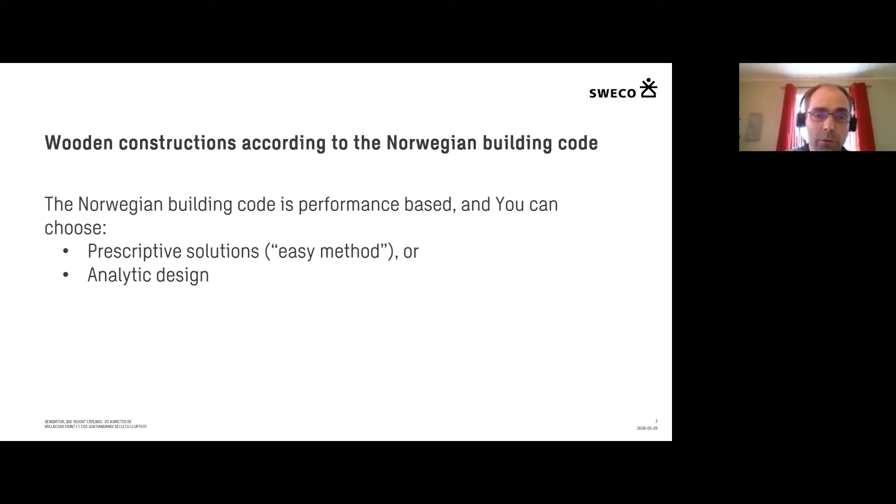In Norway, our building code is performance-based, and we can choose either to do prescriptive solutions, what we call the easy method, or we can do a full analytical design.

If you use the simple method, the prescriptive solutions in Norway have different requirements of the load-bearing systems according to the building height. So in buildings with 1 to 4 floors, we are permitted to use wooden constructions in the load-bearing structures. But buildings with 5 or more floors require non-combustible materials.

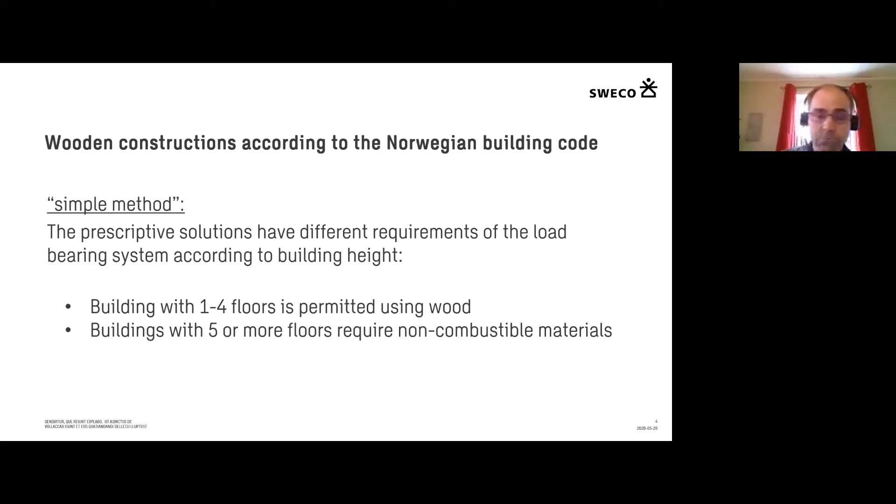That is why in wooden buildings with more than 4 floors, we have to do analytical design. The Norwegian building code requires that the main load-bearing system shall be dimensioned in order to maintain satisfactory capacity and stability through a burnout, as it can be modeled.

This is the difficult part when we're working with wooden construction, because the construction will burn itself. Even though the fire burns out in the building, we have to prove that the load-bearing system will not continue burning and in the end collapse. So that's the difficult part of working with wooden structures.

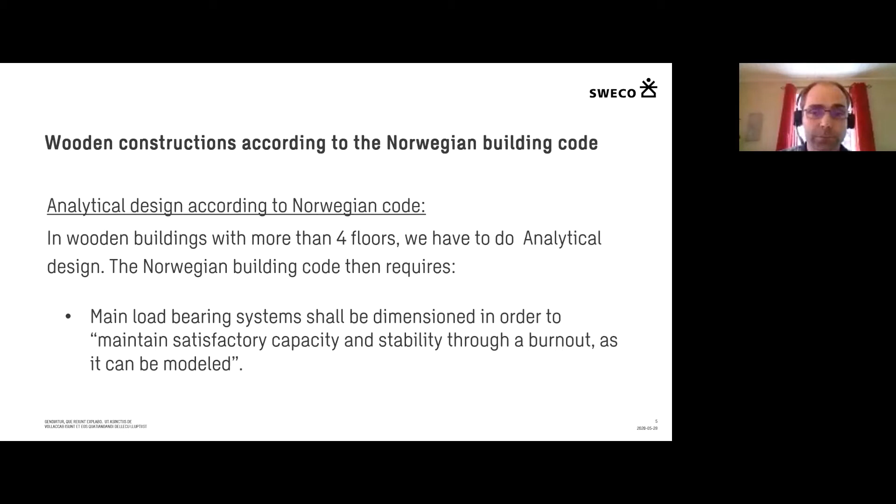So in Mjøstårnet, the solution is analytical design. We have to prove that the building maintains stability through a burnout scenario, and we have to increase fire safety with several design solutions and fire safety technology.

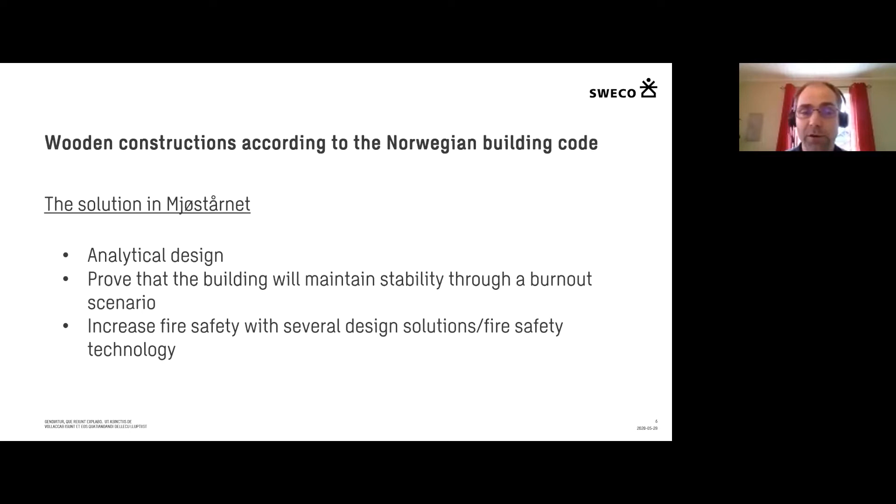Let's look at the fire protection strategy for Mjøstårnet. When we work with this building, the main challenges are, of course, the height of the building. This one is 85.4 meters high. So that's a main challenge for us.

We have to prove the load-bearing system will work through a burnout scenario. This building is not allowed to collapse. There is a wooden façade, and this gives a risk of fire spread outside the building, which is a main problem. And of course, hidden fires.

A building with combustible materials will have a problem with fire spread in closed areas and things like that. So the main challenges are both the height and the use of wood in the facade, the load-bearing system, and hidden fires.

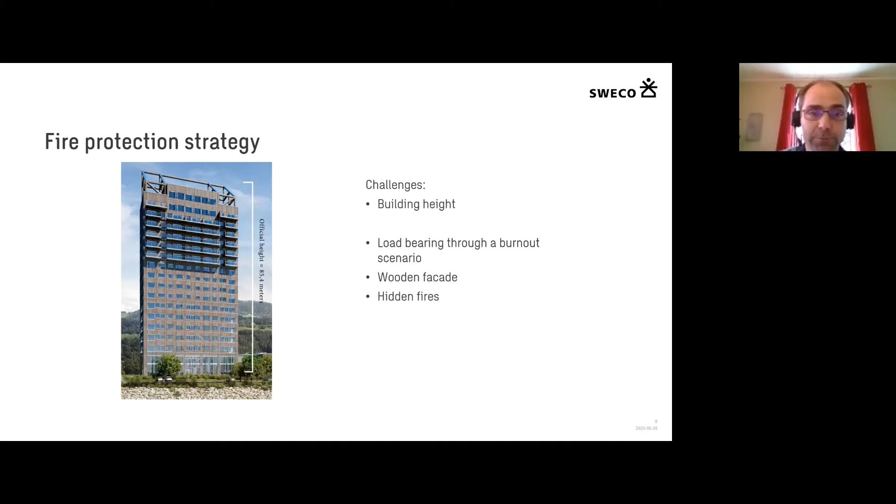When constructing Mjøstårnet, we have dimensioned the load-bearing structures with 120 minutes of fire resistance. Additionally, we have proven that this will maintain stability through a complete fire, or total burnout, in the building. I'll tell more about that later.

All the shafts are closed for each floor with 60 minutes of fire resistance. We don't want any fire to spread from floor to floor through open shafts and sealed areas like that. So every shaft is closed for each floor.

Of course, we have sprinkler protection, but in this case, we have increased reliability on the sprinklers. It means double water supply, quick response sprinklers, a lot more water. And in this case, we have also connected the sprinklers to the fire alarm.

This means if someone tries to disconnect any of the sprinklers, you will get a technical alarm on the fire alarm, so you know what's actually happening in the big building. All this is to increase the probability for the sprinkler to control or even extinguish a fire before it becomes a problem for the combustible materials in the building.

The next one is the vent hoses in the building. We do some fire protection of them. We don't want any warm metallic hoses to ignite combustible materials, so there are insulation materials to protect them.

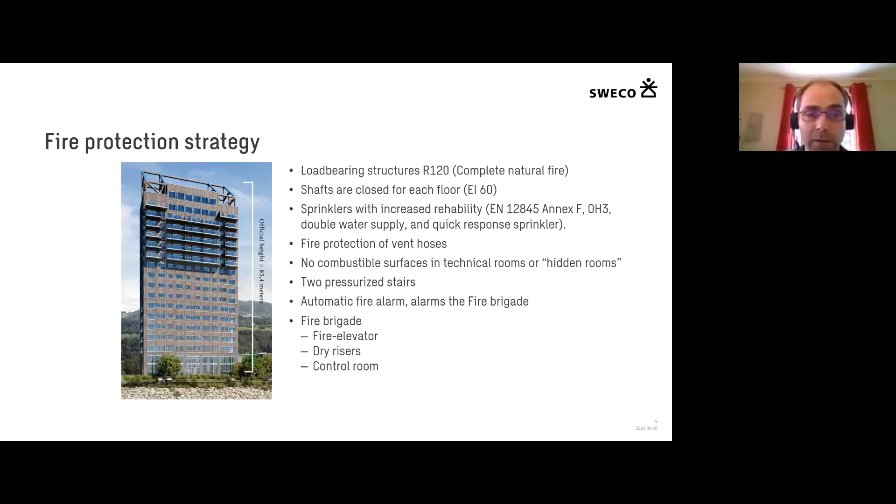This is not common in Norway to use control rooms. I know other countries have this in their regulations. In Norway, we don't normally use that, but we added this part in Mjøstårnet.

Then we have the facade, and as I told earlier, it is a wooden facade in the building. These are made with elements for each floor, and the cladding is made with fire retardants, so they will resist to B-s1,d0.

It means difficult to combust, low smoke production, and no burning droplets. We do not allow any combustible insulation materials, no plastic materials or things like that, only materials which remain A2-s1,d0, incombustible materials.

Certain areas of the facade are sprinkler protected. This means balconies and the first 2 levels of the building. We want to protect the building against outside fire.

And even though the 2 first levels of the facade are made mainly with glass and aluminium constructions, there are some wooden parts, and we protect them with outside sprinklers. We don't want an outside fire to threaten the building.

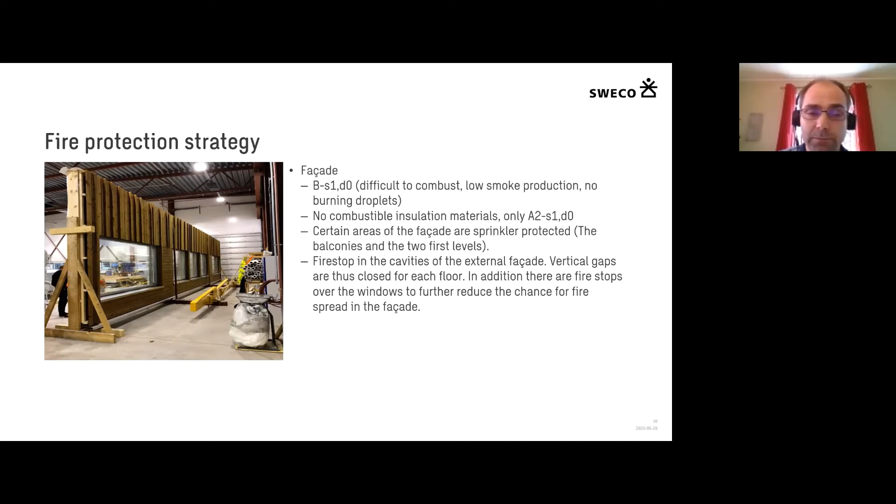If you look at a typical floor plan, you can see this picture is a little bit small, but I'll explain. These red lines are the staircases and the elevator shafts. They are made with CLT elements, 60 minutes of fire resistance, and they are all treated with retardants to ensure B-s1,d0.

One of the staircases and all the shafts are covered with non-combustible materials. As I told earlier, these technical rooms, hidden areas, and one of the stairs have CLT covered with plasterboards to reduce the risk of fire spread.

The blue lines are the other walls in the floor plan. They are made with traditional non-combustible materials, 60 minutes of fire resistance. In a typical floor plan like this, we have a large office area around the facade.

We have one fire cell for technical rooms, separate fire cells for technical rooms, storage rooms, and shafts. We have separate fire cells for the corridor in front of the staircases and elevator shafts. The same principle applies in the part of the building used for hotel rooms, but of course every hotel room is its own fire cell.

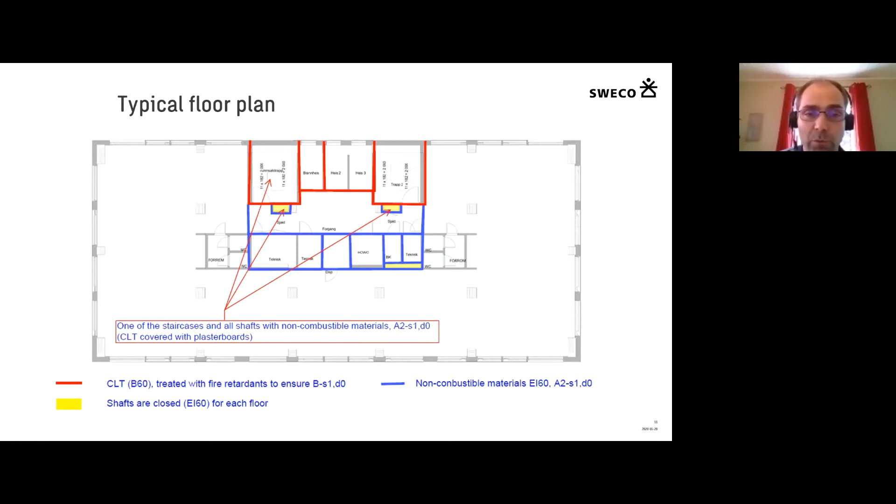If you look inside the building, we can see a typical compartment where we have these large glulam beams and columns, but the rest of the materials is quite traditional, with plasterboards on the wall. We have concrete with traditional floor materials, and ceilings with incombustible materials.

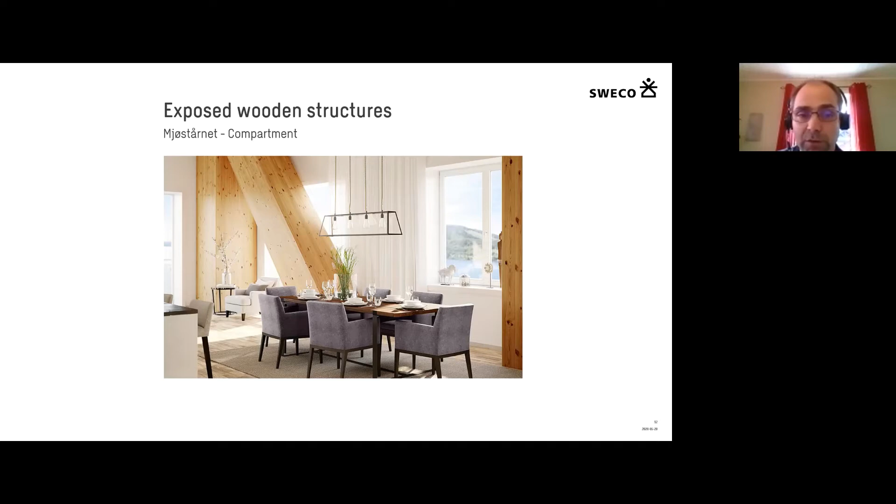We can see the same in a picture of the office part. We have these large glulam constructions in wood materials, but the rest of the materials is traditional.

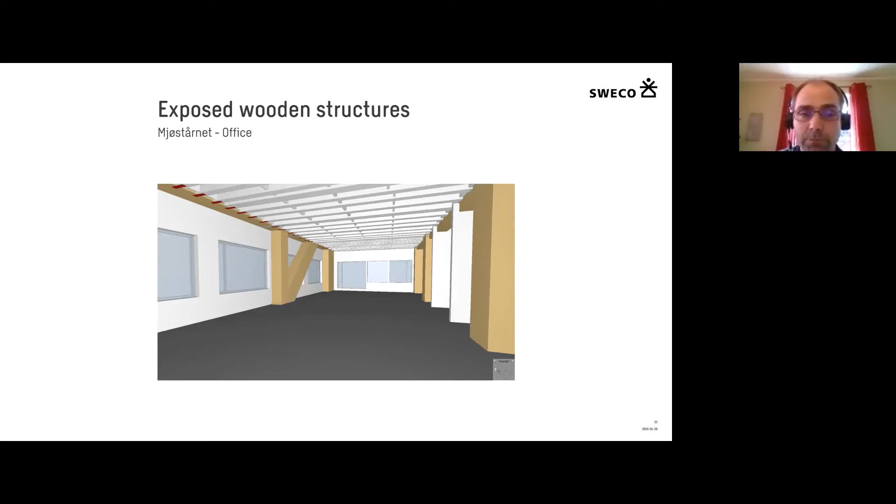So I wanted to say more about the design philosophy behind this building, what kind of testing and research we have done, and how we prove that this wooden construction will resist a complete fire or a total burnout.

When we do analytical design with wooden structures, we have to look at what happens to the structure after the fully developed fire. In the decay period of the fire, will the wooden structure continue to burn, or will the charring stop when the fire inside the building burns out?

The question is, can we use something from the examples on the pictures below in designing wooden buildings? The picture on the left shows some trees after a forest fire. In this case, there are a lot of combustible materials. It's outside, so there's plenty of oxygen and there's been a lot of temperature, but still these trees are remaining. Why is that?

The picture on the right shows a traditional campfire. The question is, why are these logs remaining after the fire has burned out? When we work with these kinds of problems, we want to investigate and better understand whether we can use some of these principles in designing safe wooden constructions.

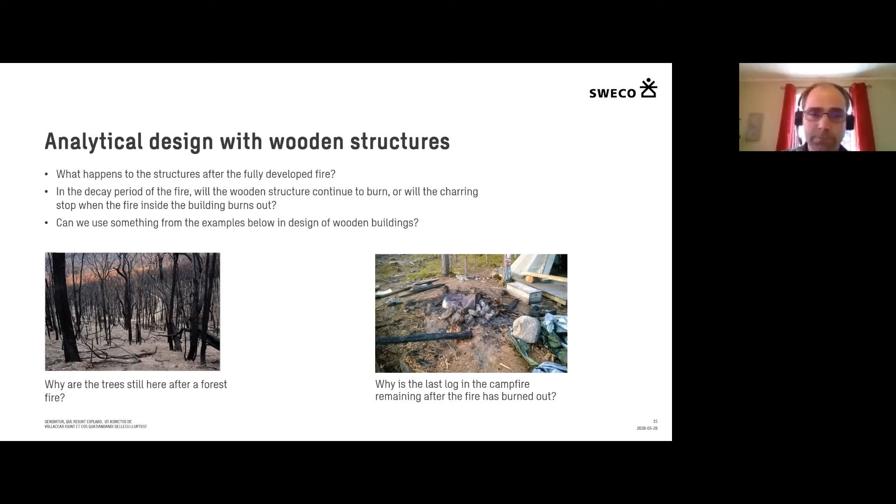So in preparation of the Mjøstårnet project, we did some testing to learn more about the decay period of the fire. We wanted to study what happens with wooden structures after the fully developed fire. Will they continue burning, or will the charring of massive wooden structures stop, like you saw with the log campfire on the slide before?

So we have tested charring of wooden constructions, and we are especially interested in the decay period of the fire—not the fully developed fire, but what happens afterward when the fire burns out in the building, and what happens with the wooden structures, which are combustible.

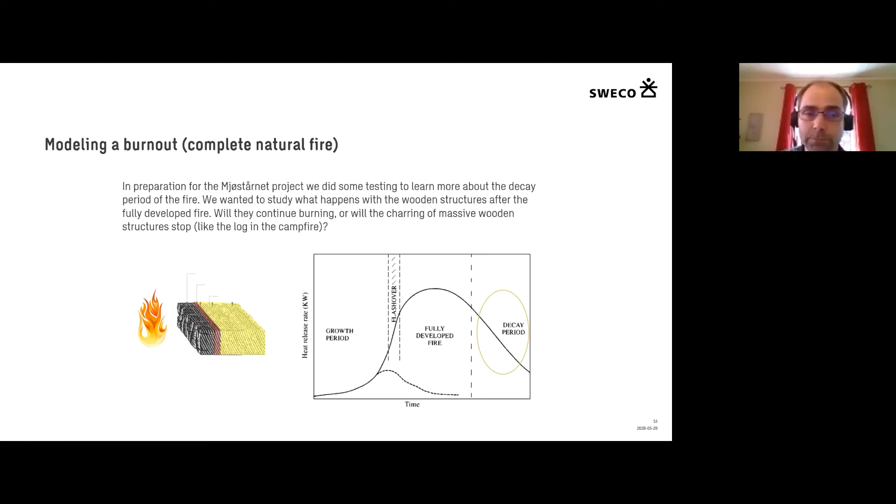We have done some tests, and we made some test columns, which we brought to a laboratory in Trondheim, Norway. We put them in a test oven and used a time-temperature curve for 90 minutes before we turned off the burners.

90 minutes is from the Norwegian prescriptive regulations. It says 90 minutes for a building with more than 4 floors. So that's why we used 90 minutes. But these tests have been done many times before.

Normally you take the columns out of the oven, cool them down, and measure the charring depth. What was interesting was the cooling phase. So we left one of the columns inside the oven, where there was still a lot of temperature, and we lifted another column out from the oven and put it at room temperature.

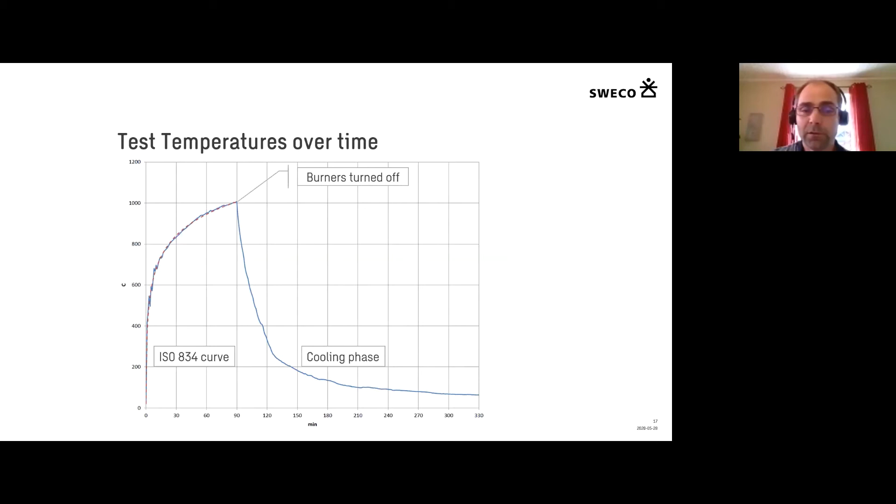For both cases, we wanted to investigate what happened in the cooling phase. We let the fire and charring continue for as much as 5.5 hours before we stopped the test. Normally you stop after 90 minutes, but we continued for 330 minutes.

We had 3 columns made by Moelven. All of them are 50 by 50 centimeters, and the height of them is 3 meters. As you can see, we have a lot of temperature sensors mounted inside them, so we can follow the rise of temperature and the charring in the constructions.

Columns A and B are made to investigate the charring depth and the temperature rise inside the wooden structures. Column C is made to investigate the connections of steel. Mjøstårnet is designed so that the steel connections are protected with the wood itself. The theory is that a steel construction behind the charring layer will never reach critical temperature for the steel. So we wanted to test one of these connections to see what actually happens.

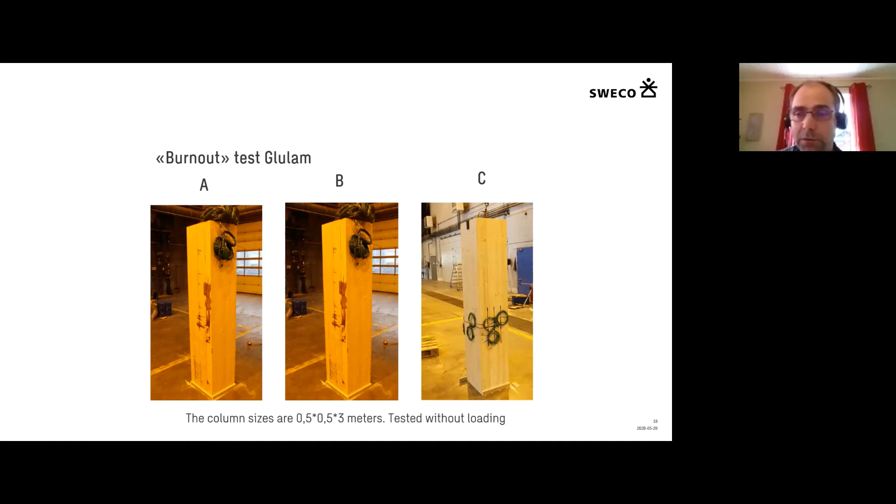On this slide, you can see a principle for such connections with the steel plates inside the wooden constructions. To secure these gaps or slices where the steel plate is, they are mounted with intumescent strips to stop the fire from entering the steel. All the holes for the bolts through the constructions are covered with wooden plugs or fire sealant.

The picture on the right, from the test, shows it still continues burning and charring. Those black lines here are the intumescent strips protecting the steel in the gaps in the wood. We used the Eurocode's reduced cross-section method in dimensioning these details, but we did a burnout test to actually measure what happens.

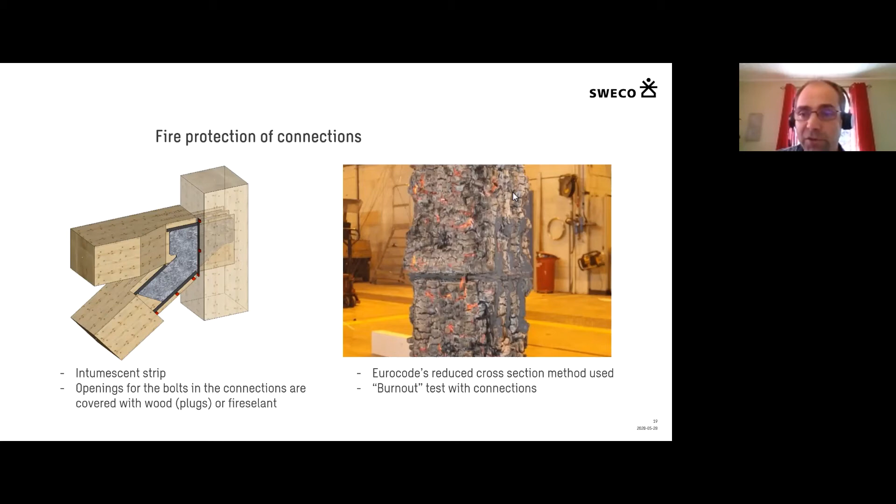Here you can see from preparing the test, we have the steel plates inside the columns. We have these intumescent strips protecting them from the openings between the wooden constructions. We have a lot of temperature sensors inside. And here you can see the bolts holding this together, and the holes I told you about are, of course, here. All the holes for the bolts are plugged.

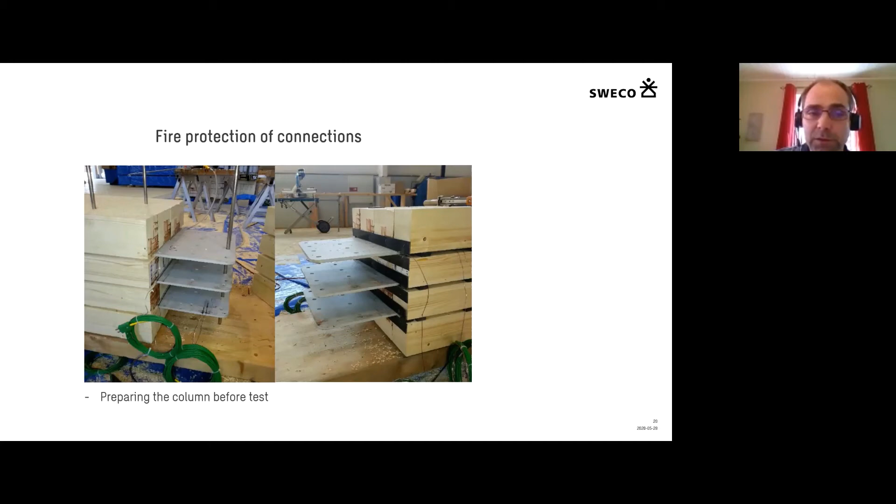Sealed with wooden plugs. But in this test, we wanted to see what happens, how effective these plugs are. So on one side, we sealed with wooden plugs. On the other side, we left it unsealed, meaning there's an opening in the column to the bolts behind. We have the steel plates here, and these are the bolts through the construction. We have an intumescent strip covering this gap, with sealed bolts on this side and unsealed bolts on this side.

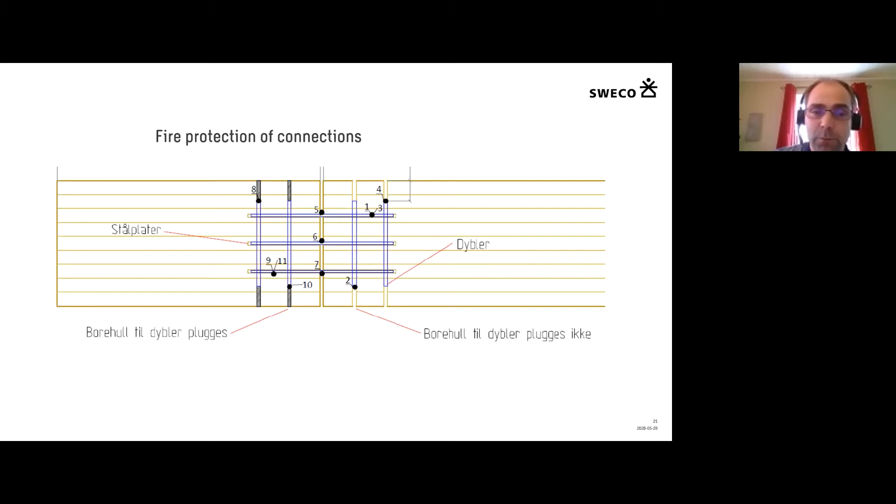From the test, we had some interesting results. We can see that all these temperatures are far below what's critical for the steel constructions. We know that the temperature in the charring layer is 300 degrees, so what's behind will, of course, have a lower temperature. But we wanted to investigate if this actually happens, and we can see we have no more than 250 degrees in the steel constructions inside.

These lines, you have some stippled lines and some complete lines. The complete ones are those sealed with wooden plugs. The stippled lines are the parts not sealed with wooden plugs in their bolt holes. It's interesting to see there is not a very big difference in temperatures between those two sides, and this is only in the first part of the test. In the second part of the test, the temperatures are pretty much the same.

We believe this is because when charring, the wood will expand and it will itself seal and insulate the steel behind. When designing Mjøstårnet, we did protect all the bolt holes with wooden plugs, so this is a safe-side solution. But this was an interesting thing we learned from doing this test - that maybe there is not very big difference between those that are sealed and those that are not.

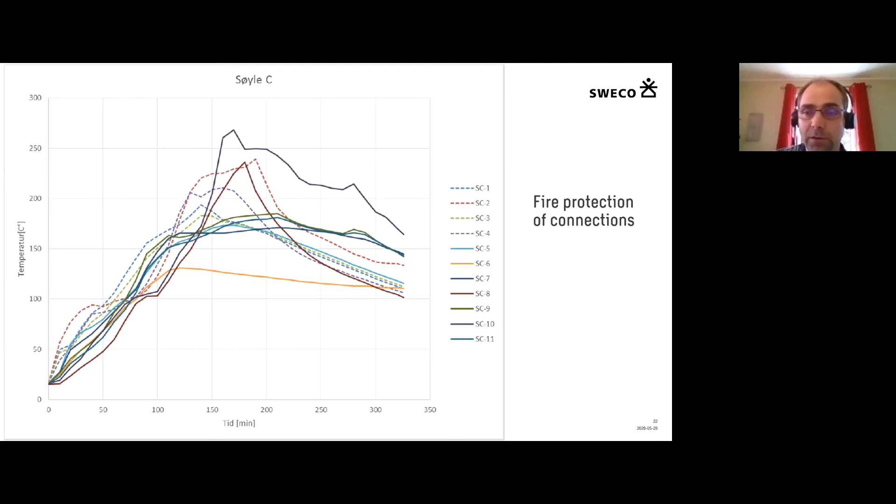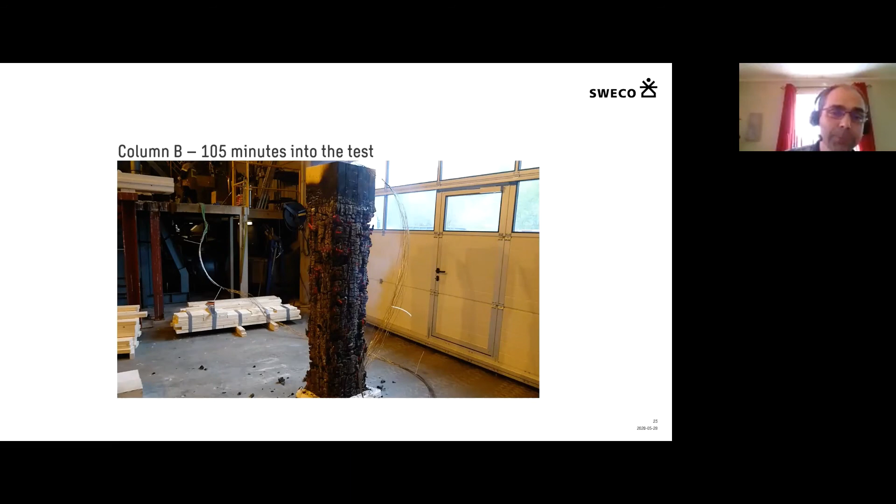This is column B, one of the columns used to measure and investigate the charring depth. It's 105 minutes into the test. You can see it still burns and chars.

This figure shows the measured temperatures. The yellow line is 40 millimeters inside the columns. The red one is 60 millimeters inside the columns, and the blue line is 90 millimeters inside the columns. The line stops when the charring layer reaches the temperature sensor, because then we can no longer measure the temperature inside the wooden constructions. We can see that the charring reached 40 millimeters into the columns somewhere between 65 and 70 minutes. It reached 60 millimeters inside the column somewhere between 95 and 110 minutes, and it never reached 90 millimeters inside the columns.

We also can see that the maximum temperature at 90 millimeters inside the columns is around 160 to 170 degrees. This is after 180 minutes, and after that, there is a cooling phase and a decrease of temperature throughout the structure.

Another interesting thing we found in this test: we had one sensor in the middle of the column, and this one never showed more than 40 degrees Celsius during the 5.5 hour fire test. We find that quite interesting, and it shows how well the wooden construction works as an insulation material in a fire.

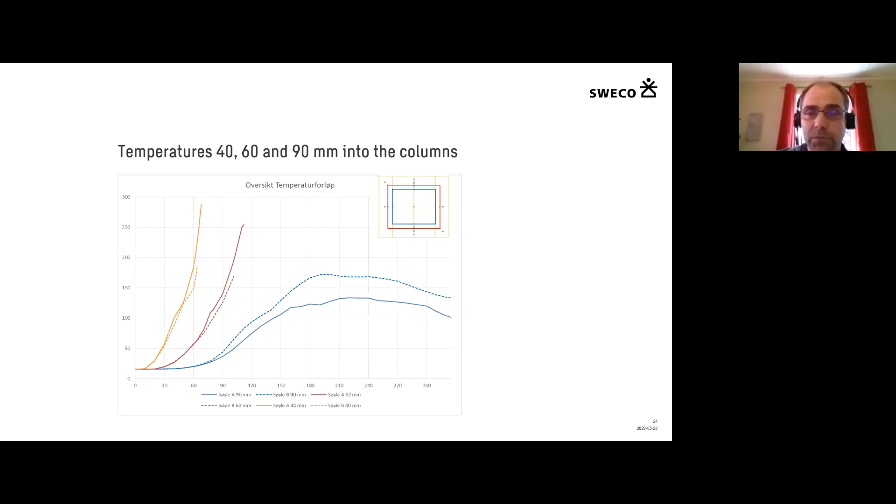When we calculate the charring depth based on the temperature sensor, this is from column A and B, you can see here. And the green line is the calculated charring depth based on Eurocodes with a charring speed of 0.65 millimeters a minute.

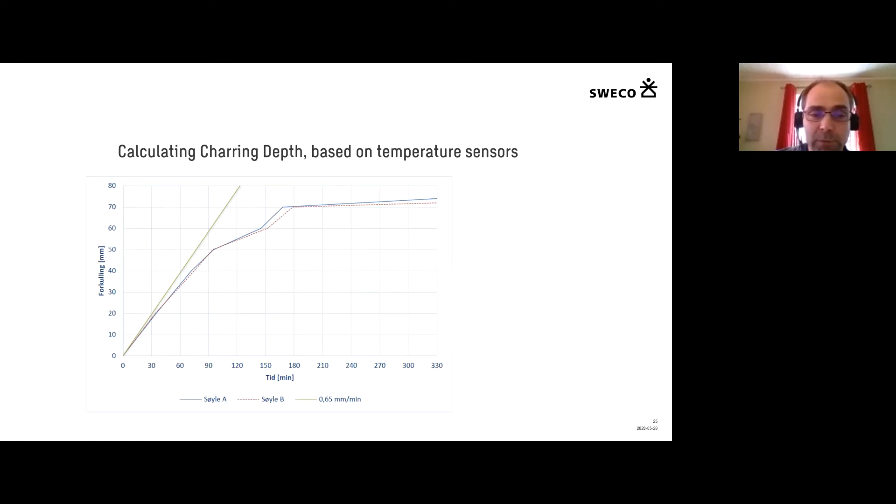And of course, we finally measured the actual charring depth of the columns. For column A and B, we got 74 and 71 millimeters, and the actual charring rate was less than according to Eurocode. We can see this as well in our calculations. The one we tested was actually lower than based on the Eurocodes.

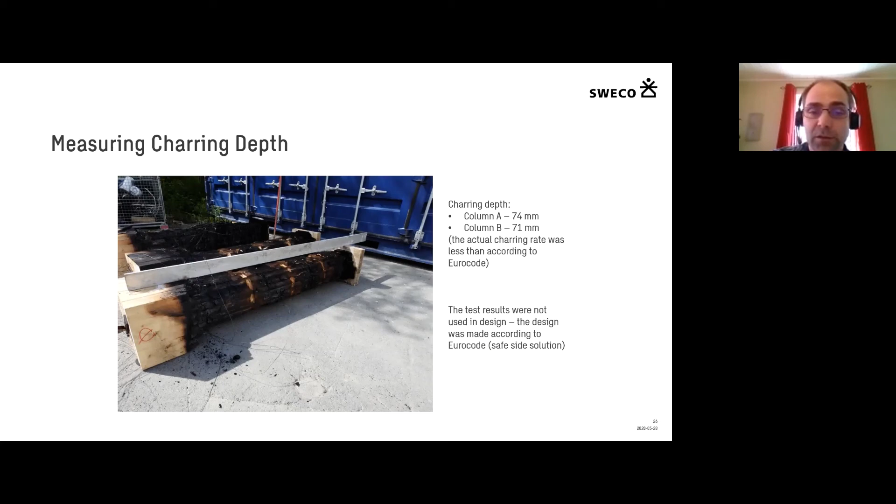But we did not use these results in designing the columns. We followed the Eurocode as a safe side solution. But the test was arranged to better understand what happens in the decay phase of the fire and to evolve calculation methods for modeling a complete fire in wooden structures. As I said earlier, it's the decay period we are studying in this test. So we use this to evolve methods for calculating the cooling phase.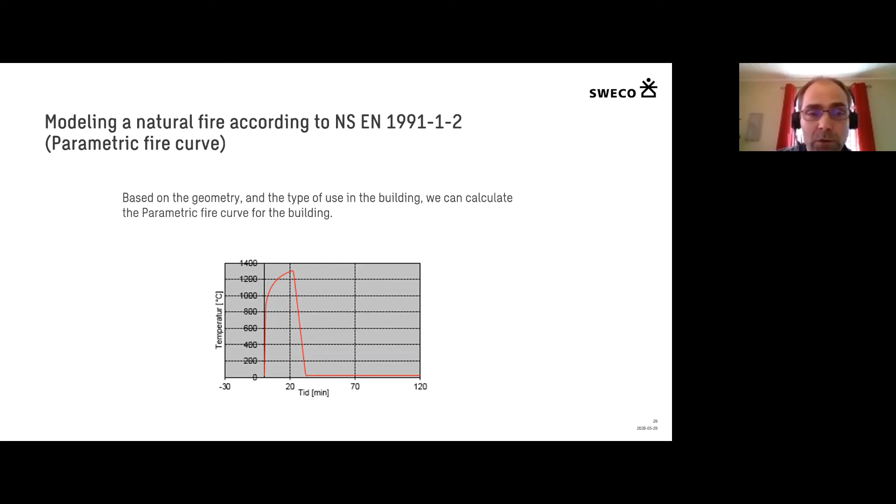And based on the parametric curve, we then calculate the charring depth and the amount of wood that contributes in the fire—the mass of wood contributing in the fire. This mass of wood will of course add up more fire energy. So we calculated the fire energy from these wooden structures and added that as input for the calculation of the parametric fire curve.

So we repeated the calculation. We calculated another parametric curve, but this time with more fire energy. When we do this, the charring depth will of course increase and give more energy to the fire. So these processes have to be repeated to investigate whether the fire will stop or if the charring will continue in the wooden constructions.

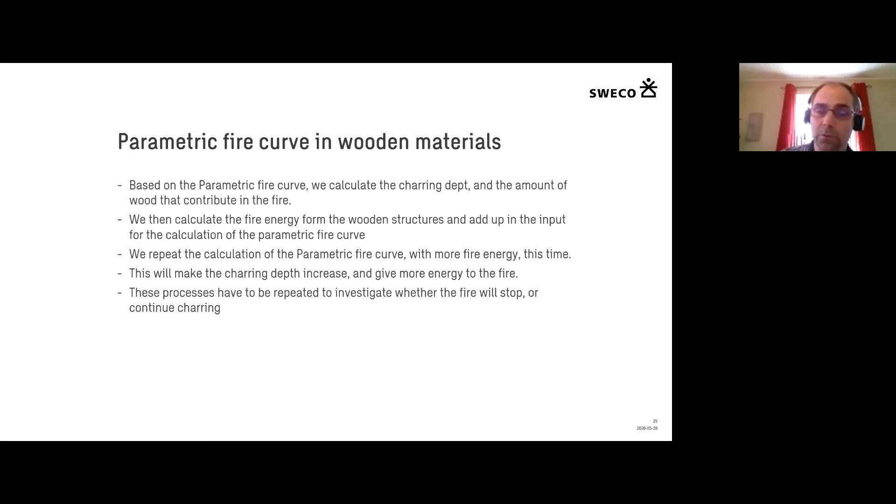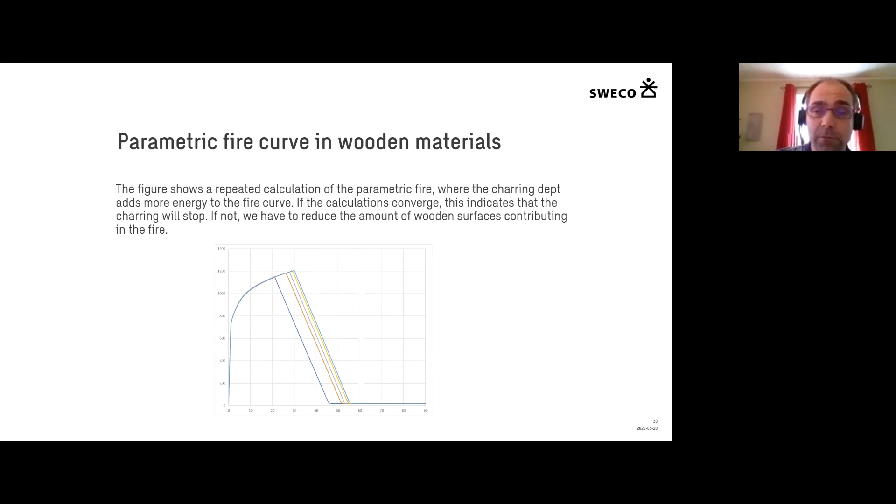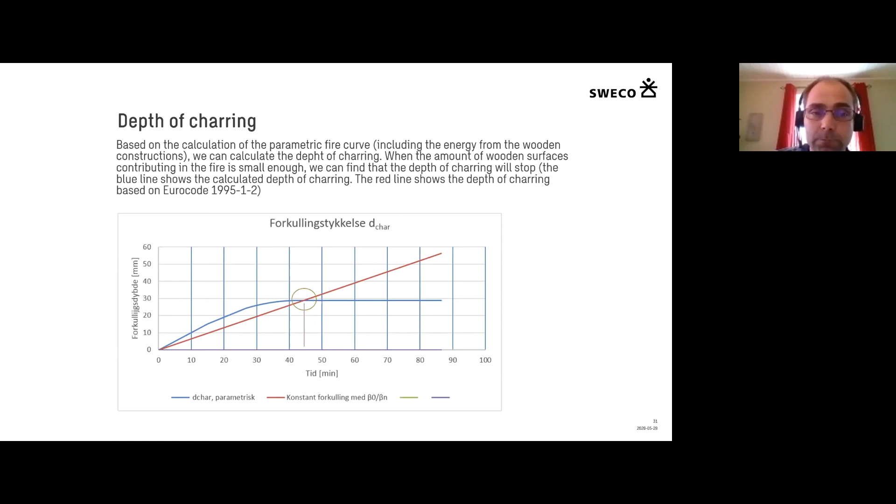If the calculations of the parametric fire curve and the charring depth show that the charring continues, we have to reduce the amount of wooden surfaces contributing to the fire. Often we use plasterboards—we cover up the wooden construction with plasterboards, and that means we have no charring behind, no pyrolysis zone, and the wooden construction behind is not affected. This part of the structure will not add more energy to the fire. So this is how we work with the constructions when we need to reduce the amount of wooden construction contributing to the fire, to end up with something that can resist a complete fire.

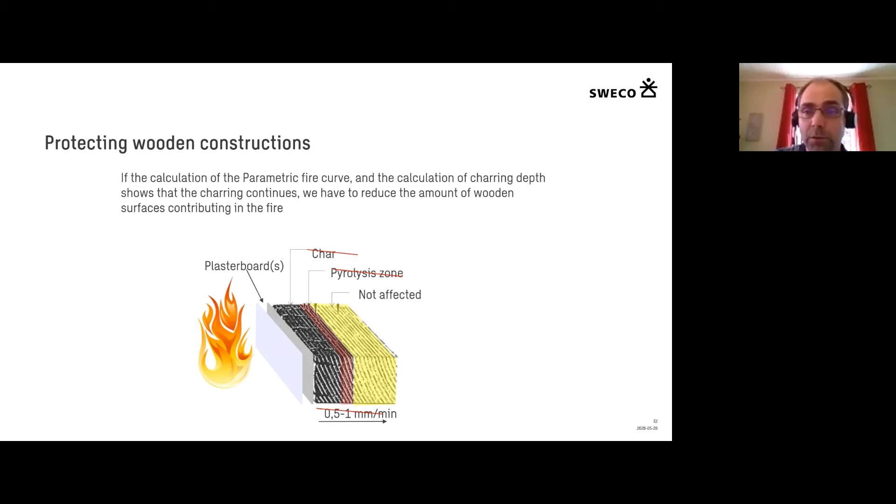Then, regarding exposed wood, we learned that large Glulam constructions, like those in Mjøstårnet, have a huge advantage over CLT in fire technical analysis. The elements themselves look massive, but the exposed surface is actually quite small compared to walls or slabs of CLT.

Reduced area equals reduced fire load. There are fewer wooden structures contributing to the fire, which is of course a huge positive when working with fire protection. The ratio of exposed area to volume is also much lower in a Glulam construction compared to a CLT construction, which gives an inherently larger safety margin for charring.

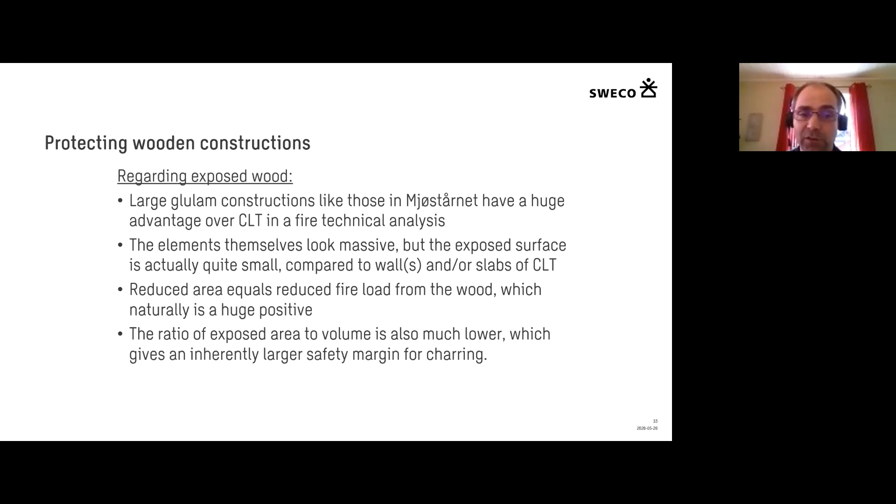When we work with combustible materials in large buildings, we have to calculate and maybe reduce the amount of wooden surfaces contributing to the fire. This makes it possible to design a combustible construction which resists a burnout or a complete fire.